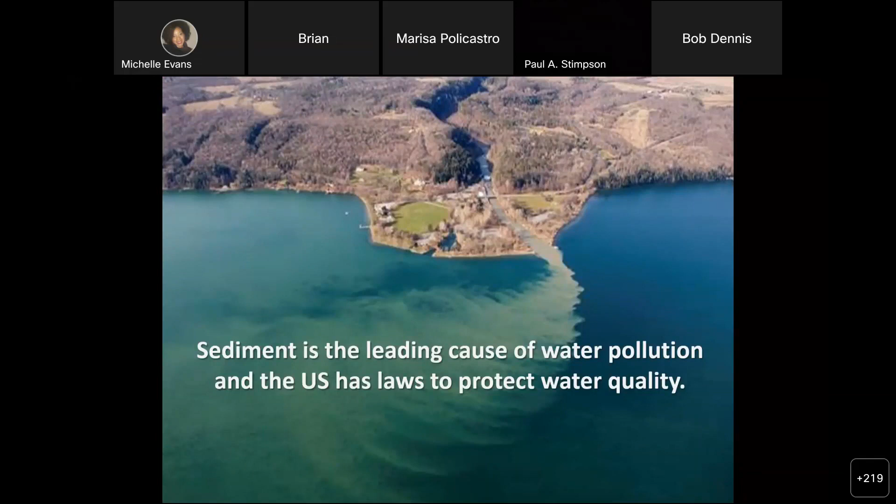And sediment is the leading cause of water pollution. Of course, you guys know the U.S. has laws to protect water quality, particularly the construction general permit as it applies to construction and development rules. I'm going to get through, if you guys can stick with me for the next 3 or 4 slides, they're a little text heavy, but after that we're going to mostly be pictures.

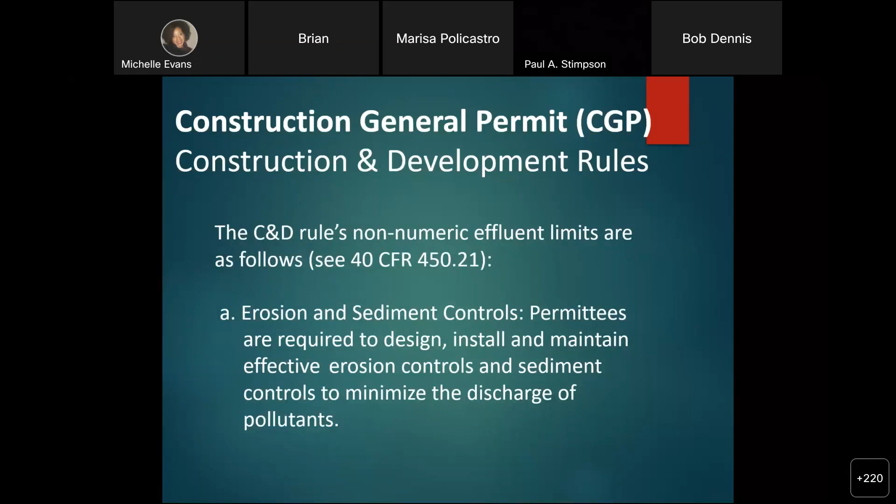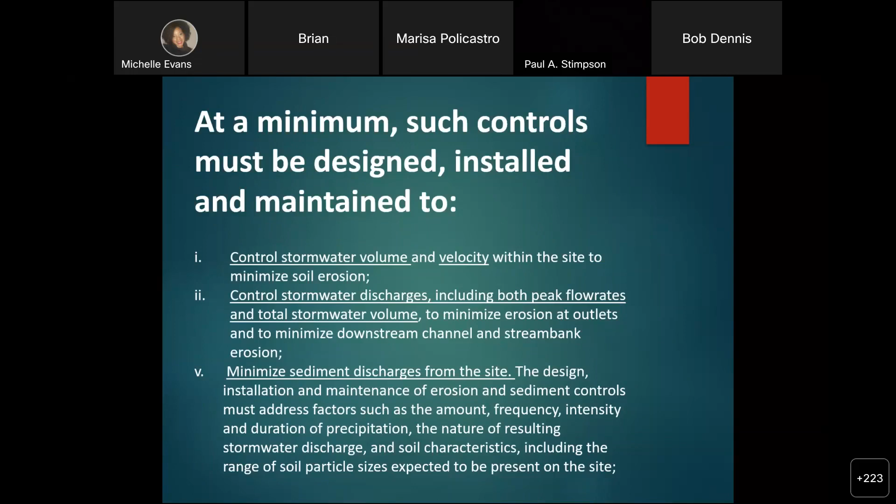So the erosion and sediment control permittees are required to design, install, and maintain effective erosion controls and sediment controls to minimize discharge of pollutants. At a minimum, we need to control stormwater volume and velocity, control stormwater discharges including both peak flow rates and total stormwater volume, and minimize sediment discharges from our sites.

Really, as it pertains to today's conversation, this rule right here regarding surface outlets in the construction general permit states that when discharging from basins and impoundments, permittees are required to utilize an outlet structure that withdraws water from near the surface. I wish they hadn't put 'unless infeasible' there, we don't need to give contractors any wiggle room on this, but this is the rule that really defines how we use sediment basins here in the state.

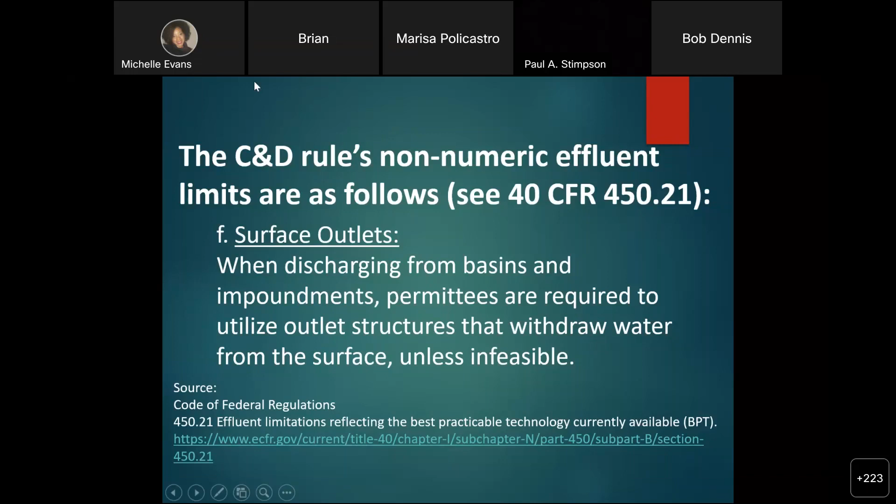If you think about the lint filter on your dryer, we need to change that usually after every dryer cycle or two, or else it clogs up and doesn't work. Same thing with these filters on perforated risers. Once you get a couple good rain events and all the sediment comes in, it blinds over that filter fabric. How do we maintain those? Typically they're not maintained, so subsequent rain events, we're looking at overtopping the emergency spillway on our basins.

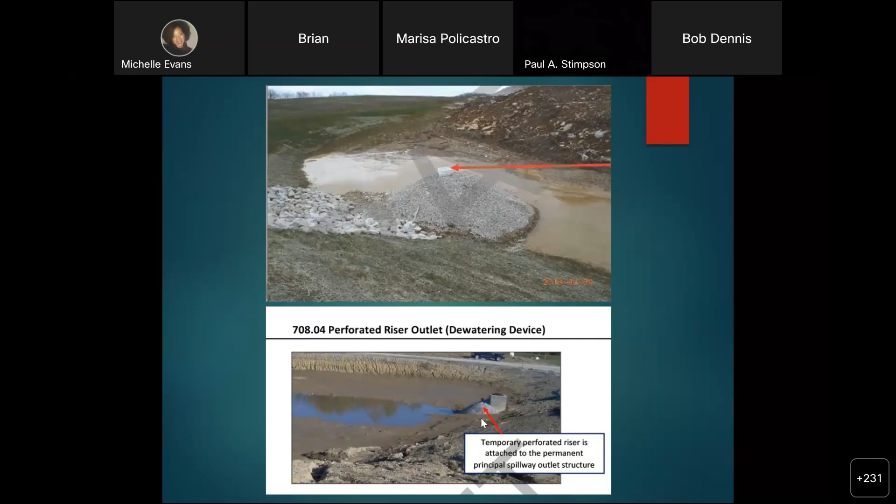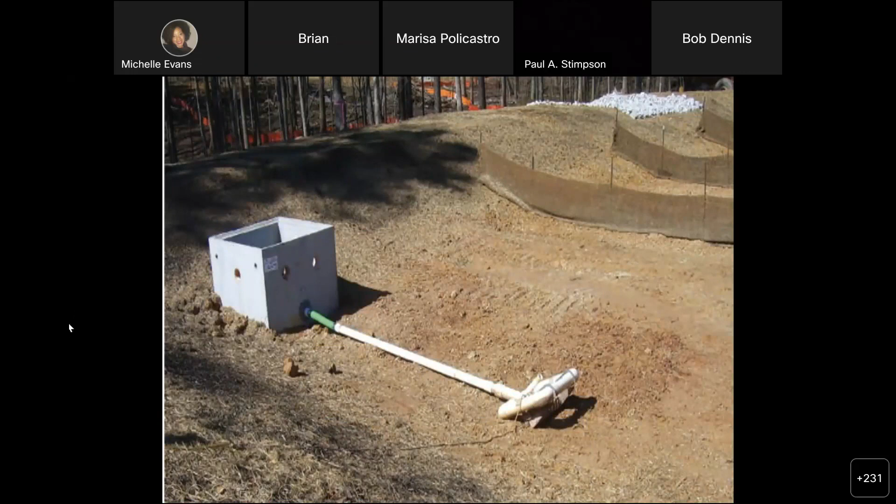Just for clarification, when we talk about sediment basins, we're typically talking about larger drainage areas greater than 5 acres. In some states, we're permitted to go up to 80 to 100 acres of drainage area. These sediment basins are typically characterized by a permanent outlet structure, as you see in the left-hand corner. That's typically what you'd see for a sediment basin compared to sediment traps.

Sediment traps are usually for drainage areas of 5 acres or less is what we're looking at for these. There have literally been thousands of these traps built around North Carolina, and they're very efficient and an economical way to control sediment where we have concentrated flow.

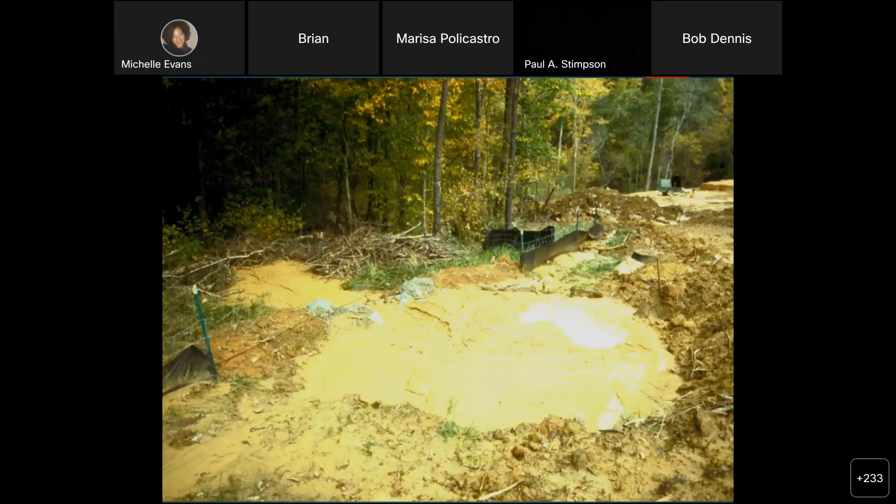So a little background on coming up with the skimmer concept. This is a typical basin, specifically a trap, in what Warren calls the Stone Age. This was standard design and practice in the early 1980s. No one really, as he says, knew what they were doing. It was just a bunch of opinions and some experience that people had.

It was allowed that the volume could be reduced if it was cleaned out more than once a year, and this was really a disaster. As you can see here, this basin is completely full of sediment, no remaining storage for the next storm. You'll notice the large amounts of sediment outside the perimeter of our job site, going down into the woods.

This is typical sediment loss from traps built this way. Here's a hatchet, put in here to scale it and show you the amount of sediment coming off that site. Although this was common, it was clearly unacceptable, and basin design needed to be changed to improve performance. So when Warren was in Orange County, he took steps to change the way sediment basins were designed.

One attempt to improve sediment basins was to size the basin for the entire drainage area, not just the disturbed area. Research stated a need for baffles to work properly. Warren had never seen a baffle, or even a slide of one. As he likes to reference, this was before the internet, so he couldn't Google what a baffle was, but it seemed to make sense that baffles should make the flow meander through the basin to increase the flow length and time of travel, giving more time for settling.

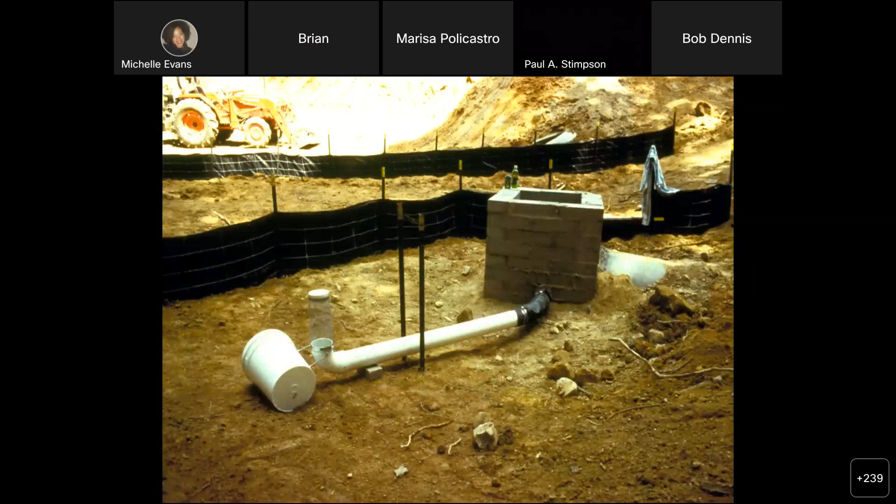So this is the first skimmer that Warren made. He convinced the developer to let him use his basin as a laboratory. He installed it and waited for it to rain to see what would happen. It's about as scientific as it got.

He waited about two months for it to rain, but after that one storm, that first storm proved the concept that the basin filled with the initial runoff and then slowly dewatered over a period of time. There was just a slight dusting of sediment downstream compared to the pictures we saw on the previous slide of the sediment damage.

So he knew he was onto something, and his idea was he wanted the skimmer to be so simple that any contractor could make one. He never imagined getting into the business of making skimmers himself. He had a good, comfortable job with the state where he could do interesting things like this. However, he found contractors cut corners making them and they didn't work properly, which discredited the concept. He also discovered that contractors typically wanted to just take something out of the box, install it, and get back on their equipment.

So he found he had to get into the business of building skimmers, at least in a small way, to provide a quality skimmer. The design had to be more complicated to solve various problems, and this design evolved to solve the problems he encountered using the skimmers in actual conditions found on construction sites. I've shown you a series of his early designs here.

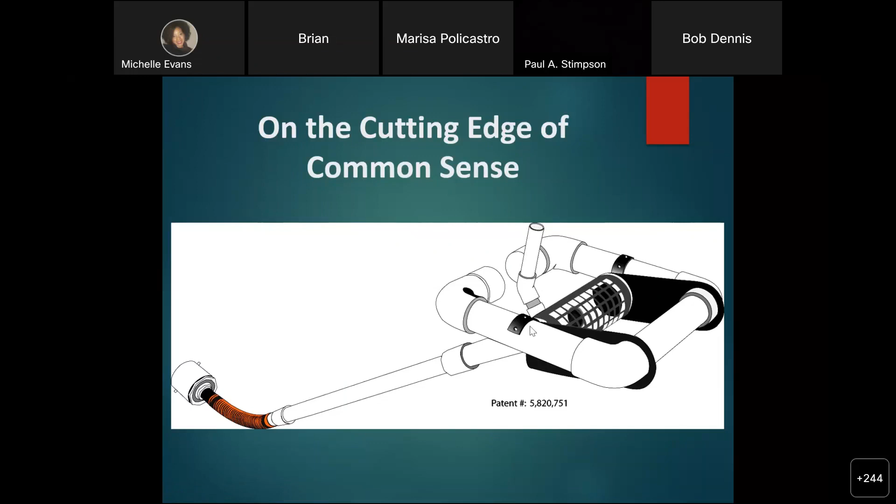Once we open up this screen, you can see the orifice is right up here at the top. We make 8 different size skimmers, and the orifice on each size can be reduced to customize the flow rate. You'll notice that the orifice is at the inlet where it has a constant head and is accessible for inspection and cleaning.

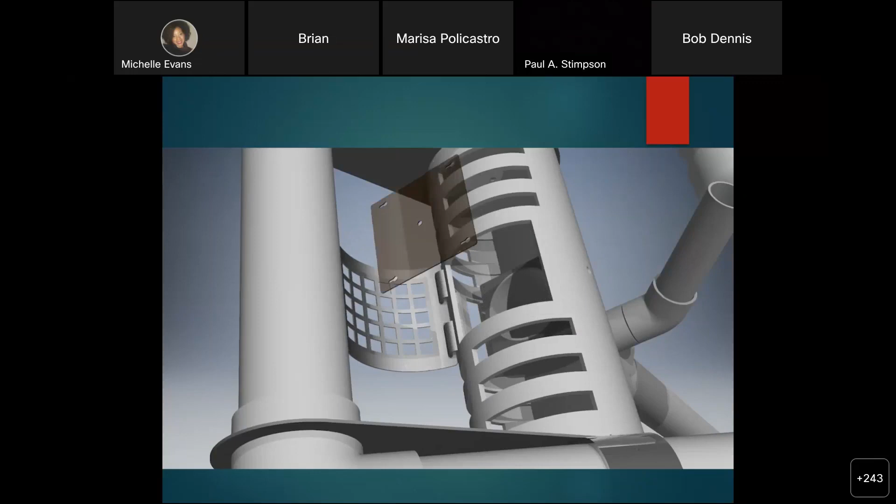We size the skimmer and the orifice for the basin's volume and the number of days to drain the basin. There's a cutter included, and it only takes a couple minutes to cut a hole in the plug or plate and install it. Again, this shows the screen, how you can open it up, change that orifice size plug. The skimmer controls the filling and the draining of the basin.

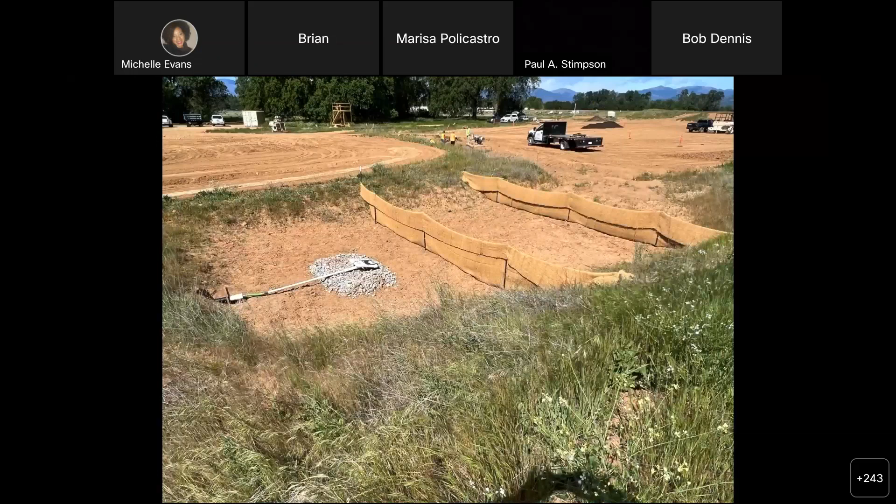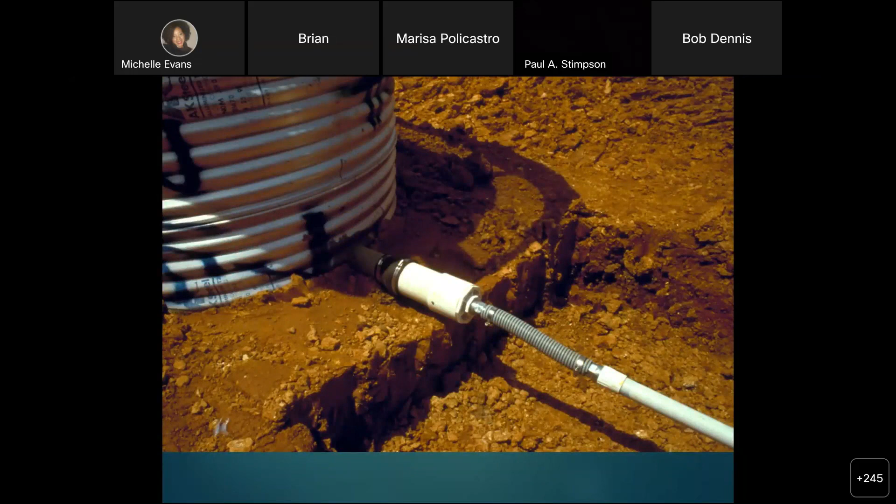These skimmers can be used in sediment basins or in sediment traps like we see here. This shows the connection piece going into that PVC pipe through the earthen dam. In the sediment basin, we're attaching it to a permanent outlet structure. Here's an up close view - you see a stub out from the metal riser, and it attaches to a threaded coupling at the end of the hose. We do have instructions for attaching it to a concrete riser.

We've even used these in tanks. These are some Baker tanks out in California at a landfill, putting the skimmers in there. They're really using these almost as roll-off sediment traps.

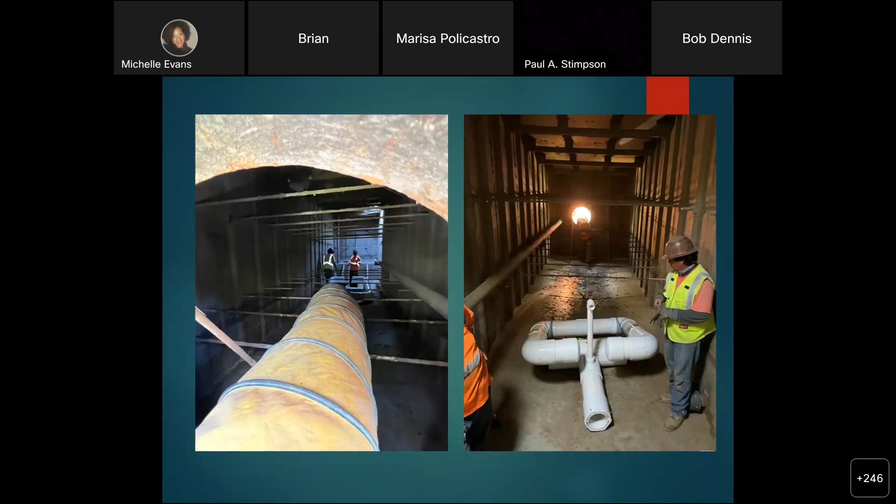One note - if you do ever plan to use these in a tank, we should talk first. These were shipped on site, and then the engineer asked, well, how am I going to get these in my 20-inch manhole? So we had to take a trip to California, cut these, get them inside the tanks, and reassemble them.

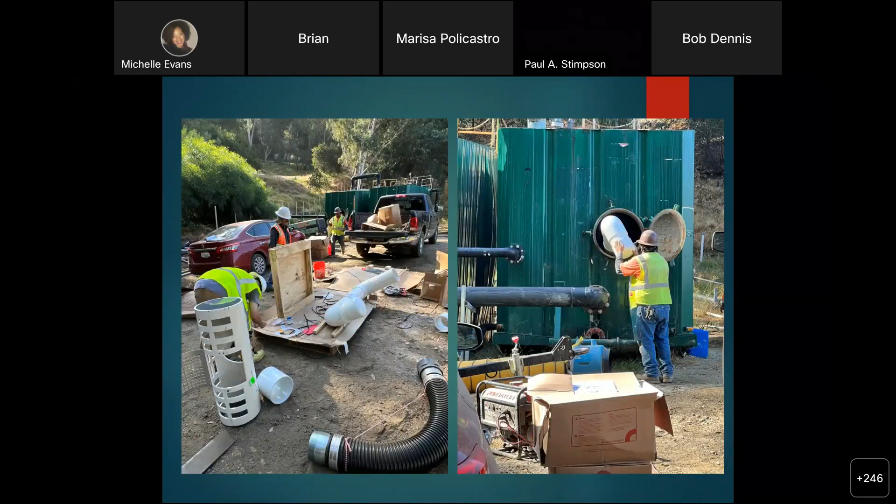So as I mentioned earlier, baffles are a key component of an efficient sediment basin. The skimmer is just one piece of it. And here you see some baffles that were installed. The basin really needs to be designed to handle the volume of the total drainage area, not just the disturbed area. And we want to make sure that clean off-site water is not running into this basin, or come up with strategies to divert it.

So these baffles here are utilized. The baffles help utilize the entire surface area for settling. And these are some of the first attempts to use baffles, and they seem to work based on the sediment accumulation behind the baffles. However, the solid baffles are deceptive in that they would channelize flow, keeping the velocity up, and that would keep the sediment suspended. And these faults were discovered during sediment basin research conducted at NC State University Soil Science Department.

And here's this research, the initial research that was done. This red line showing just the free flow of the velocity coming into the basin. Part of the challenge when you're not using the baffles is that you tend to shortcut through the basin from the inlet straight to the outlet, leaving dead zones on the side of the basin, and the velocity stays up high.

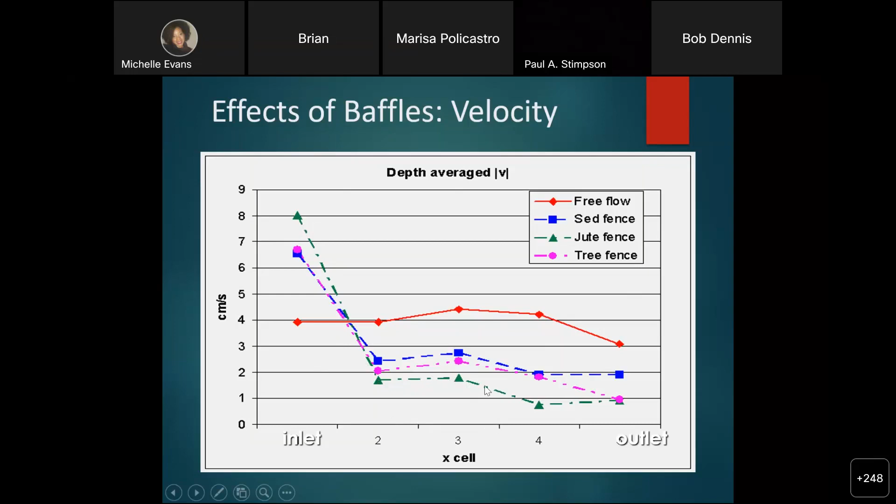When we used, you can see here, what they call sediment fence or silt fence, some of those initial ones, we're still keeping that velocity up pretty high in here. But when we use jute fence, or a porous baffle, typically now we use a coir baffle because it's better for an aquatic environment. But this green line, you can see, here's each one of the cells. So here's the first set of baffles, second set, third set, and you can see when we hit those baffles, we're really slowing that velocity down and increasing the time for settling.

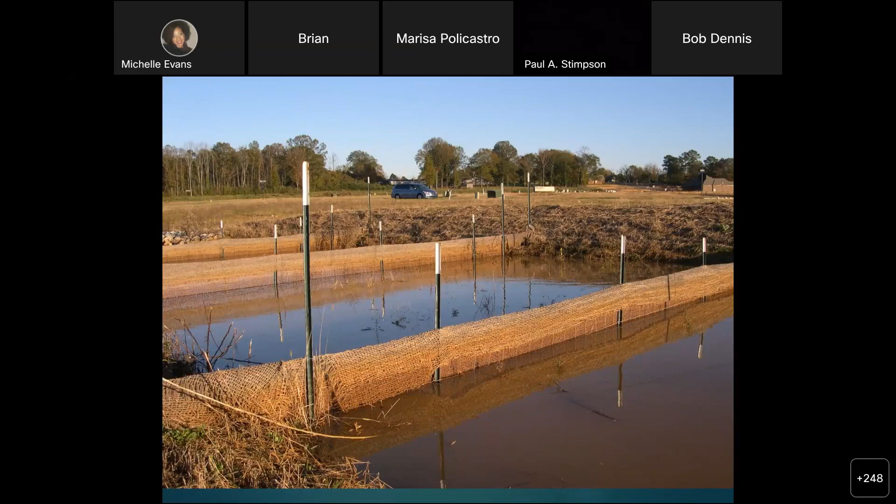So when we talk about the coir baffles, porous baffles, this is what we're referring to, and this is part of the design manual for North Carolina, is using coir baffles.

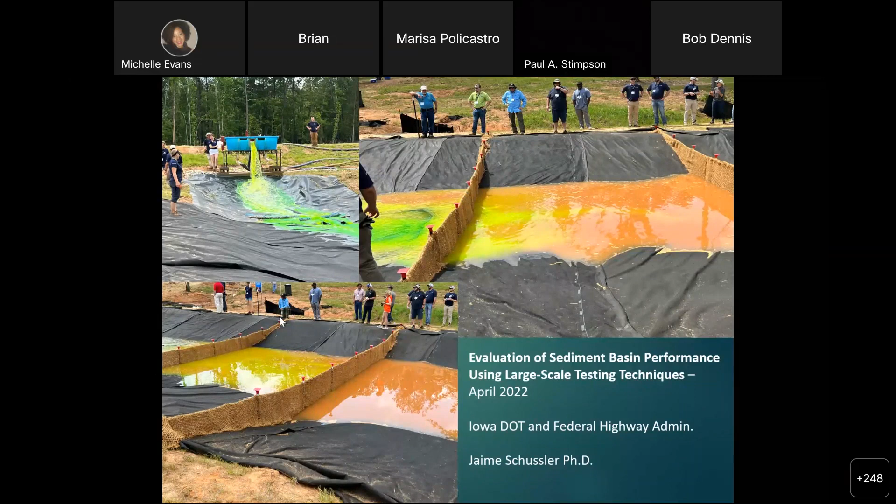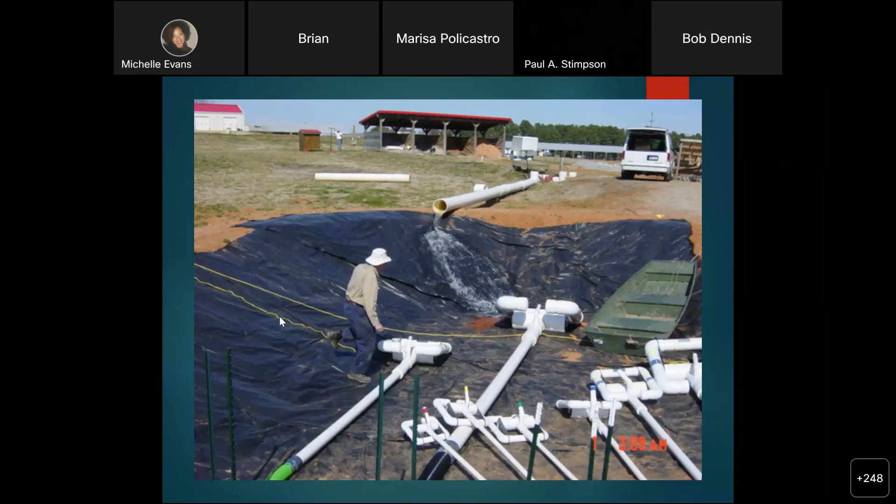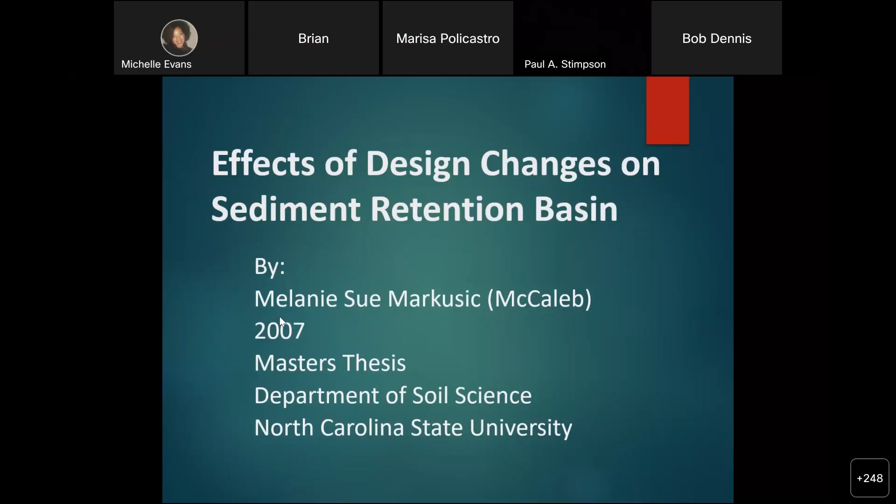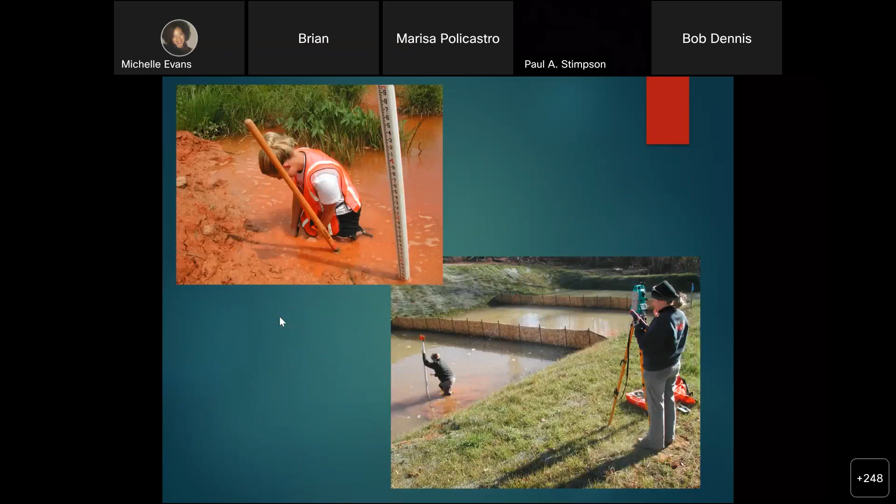You know, in a typical sediment basin with a conventional outlet, like we showed, there's perforated risers. They tend to capture less than 50% of sediment entering the basin. And the question was posed, well, what would be the efficiency of a properly designed and constructed basin with a floating surface drain? So Melanie McCaleb did some research, actually her master's thesis, on the effects of design changes on sediment retention basins. And here's a picture of Melanie out there. I like to throw these pictures in, really demonstrates her credibility and commitment to the science here.

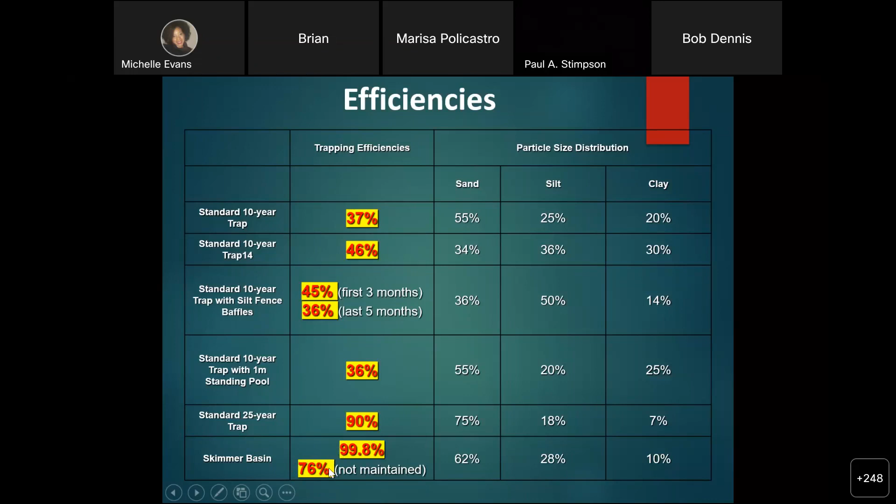So as we see, the traditional trapping efficiency of a standard 10-year trap was about 37%, depending on, there's a couple of different traps. This one's 37, this one's 46%, so below 50% trapping efficiency. When we move that standard trap up to the 25-year trap, obviously we're sizing these much larger, and that efficiency goes up considerably, almost doubles, up here to 90% efficiencies. But the skimmer basin has the highest trapping efficiency of greater than 99%. But like everything, it needs to be maintained, and so after several months of not maintaining it, that efficiency drops. And so we'll talk a little bit about how these are to be maintained.

And it was originally found in Melanie's research that the basin itself, the BMP that's supposed to help us reduce sediment discharge, was a major contributing factor, because the slopes were too steep, they're sloughing off, and greater than 50% of the sediment going into the basin was coming from the basin itself.

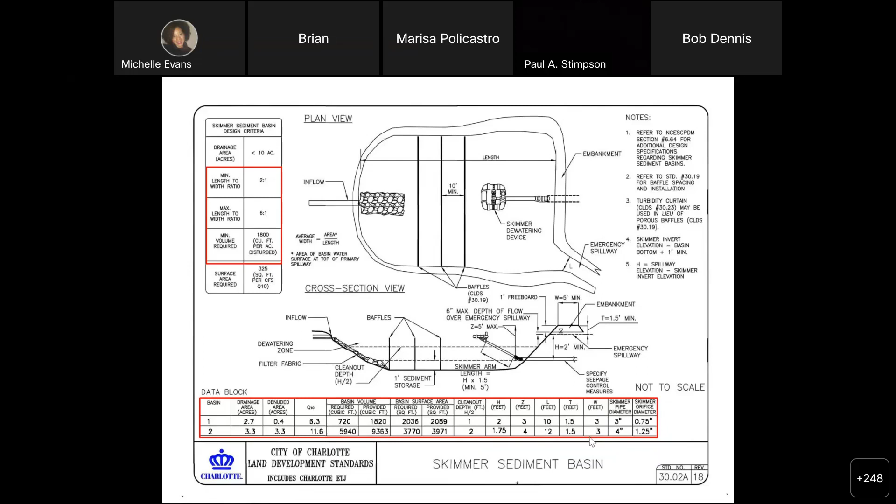It's really good if you're a designer to do your calculations here, and then we put in the size skimmer required. I put it right here in the plans, easy for the contractors to bid on and to install for the plan details. And it's important also to have a rock pile or something for these skimmers to settle down on so they don't settle down into the mud. That will allow for a small rain event to occur, and in small rain events, you won't be discharging that muddy water.

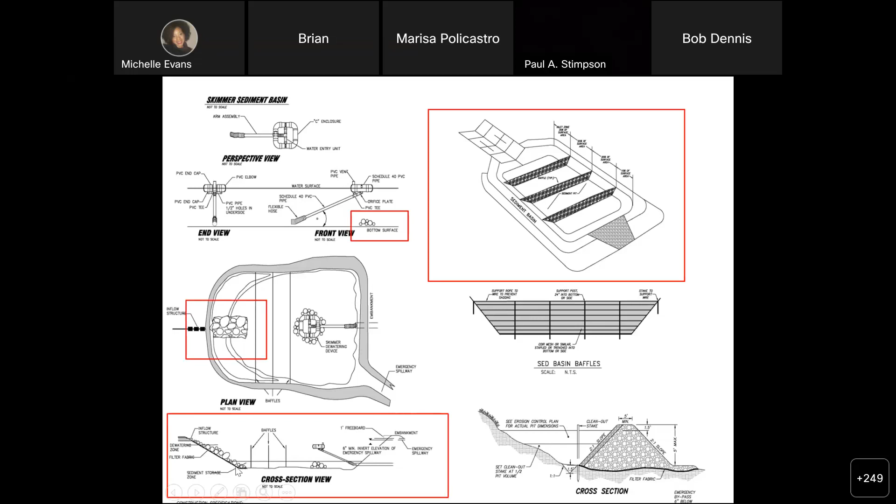As you can see here, that's that longer length to width ratio with a series of at least 3 porous baffles in there. A nice stabilized inlet there, so that inlet is not contributing to erosion within the basin. And here's a side view of the basin, again showing our stabilized inlet here with the rock dissipators, a series of 3 baffles, our skimmer, and a nice little rock pile.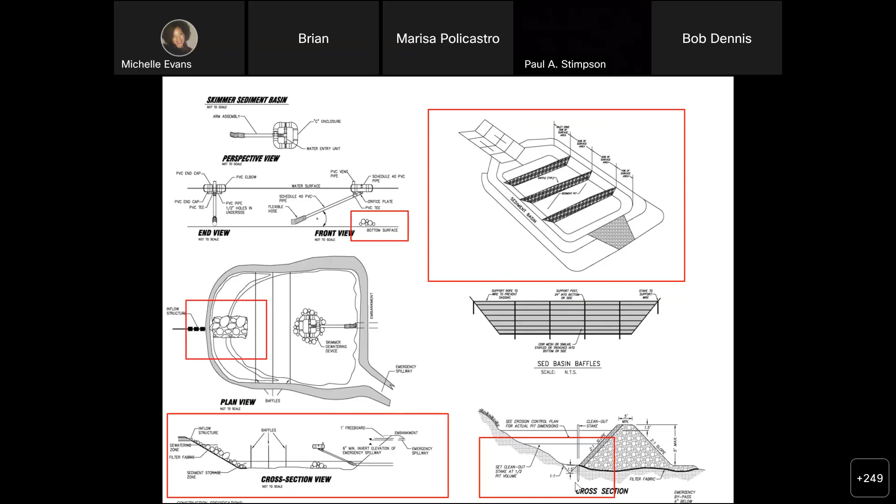And this is a really clever design detail to include: a clean out stake. Because not many people could look at a basin and just be able to tell what 50% of the storage capacity is in that basin. But putting a clean out stake in at the volume at which the basin is half full is a great way to indicate to inspectors, to the contractors, to designers, when the basin's at 50% capacity and maintenance needs to be performed to restore the storage volume of the basin.

Okay. And it should be noted that another problem that can be encountered is turbid outflow from the skimmer over several days, and obviously this can cause complaints from adjacent landowners. And there's a possible fix for this turbidity. It's worth pointing out that the skimmer by itself does not produce clean, clear outflows, particularly in clay soils. So we have some other tools at our disposal.

In North Carolina, we are allowed to use flocculants. Particularly what we use here in the Southeast is polyacrylamide. It's a linear anionic polymer. It's very important that you use one off the DEQ's approved list. It has undergone toxicity testing. These are typically food grade polyacrylamides that have a half-life of 48 hours or less, so we're not concerned about bioaccumulation in the environment.

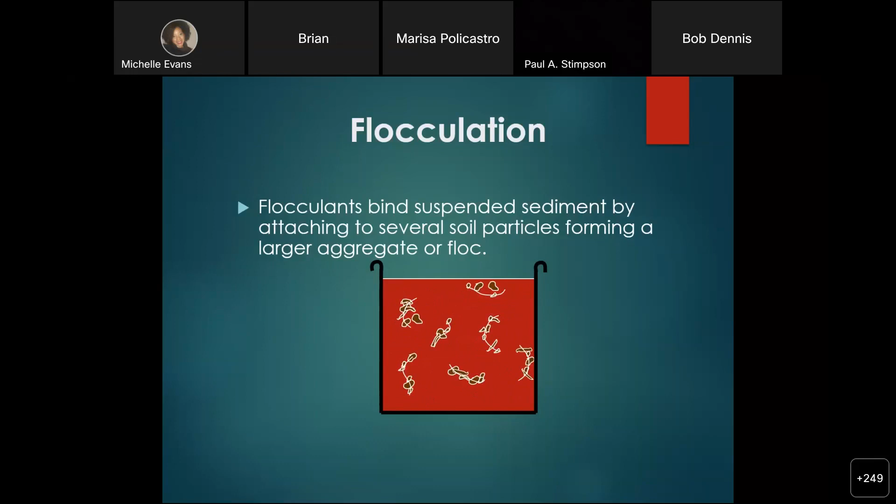But the way that these flocculants work is that they bind suspended sediment by attaching several soil particles to the exchange sites on these polymers. So it binds these, takes a bunch of small particles, binds them together in larger particles, and then those larger, now heavier aggregates will settle out of suspension.

So this is actually a fun little magic trick when we're in person. Love to do this at trade shows. It's pretty cool how this technology works.

It's really best if you can use the polymers or the flocculants in a treatment train and in conjunction with a fibrous matted material or wattles. They just do a great job. It's something about the natural fibers that tend to grab onto these flocculated soils and hold them very, very well.

So on this, we would have put a powder polyacrylamide into this channel. It's important to introduce the flocculants up gradient from the sediment basin, so there's plenty of time for activation, for the mixing, the aggregation, and allow that chemistry to work to drop the suspended solids out of solution.

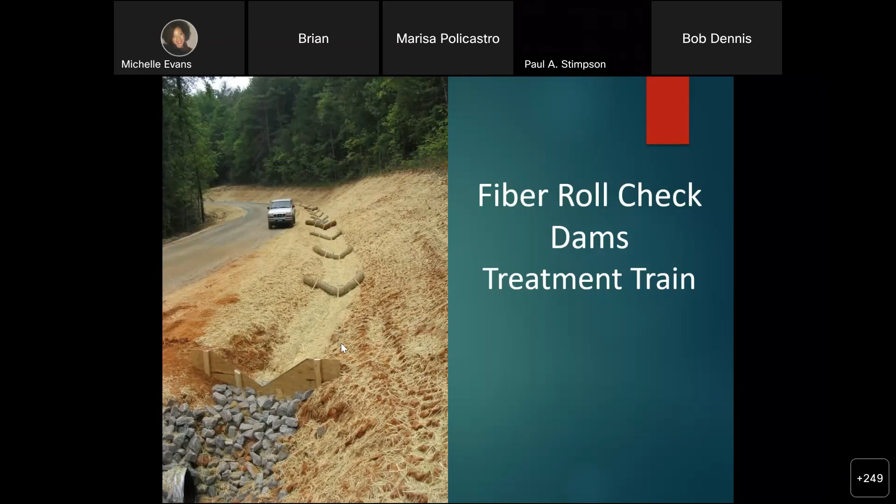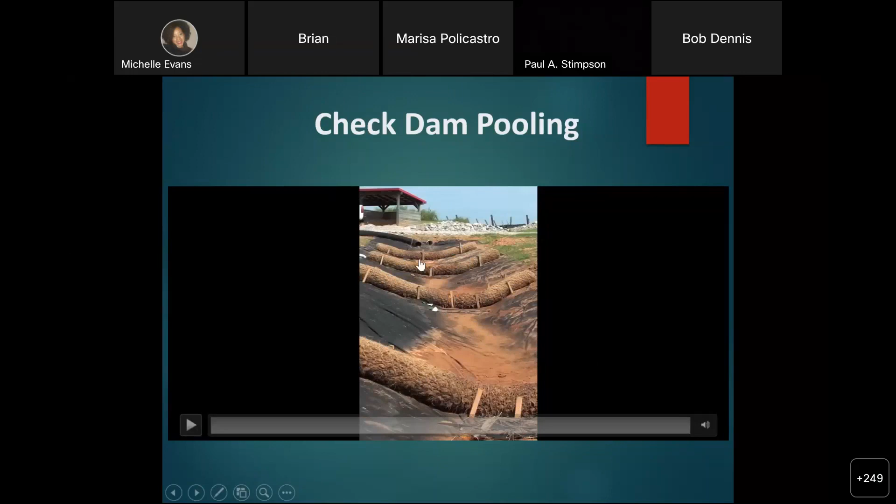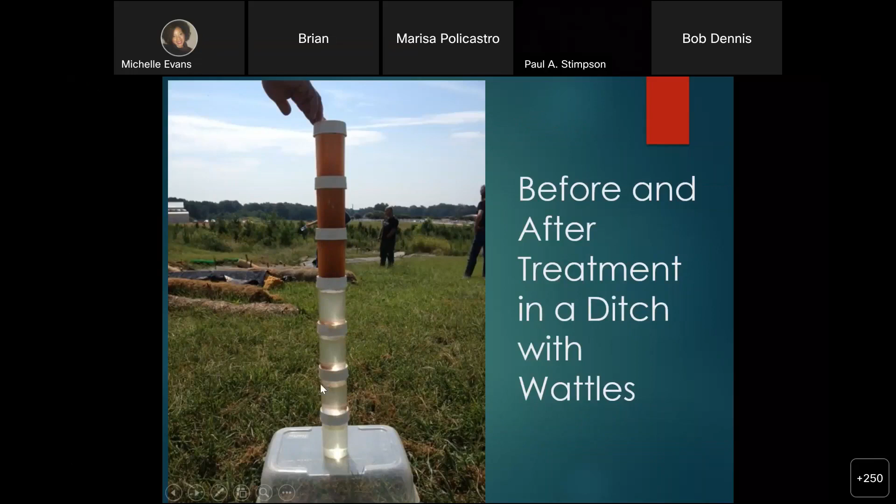And this was again out at the research station at NC State. You can see these coir wattles here were impregnated with polyacrylamide, and it created damming behind each one, pooling behind each one of these floc logs. We took samples behind each one of those logs, and you can tell as we go down through the treatment train how the water gets clearer and clearer and clearer until we're finally discharging here at the end.

And this is a stone ring dissipator at the outfall, entering into the basin, and you can see that stone on the bottom is stained with flocculated soil. But this is what we're looking for. We really want to capture that flocculated soil in the basin. So again, it's important to utilize these flocculants up gradient from the basin, so we can capture that flocculated soil in the basin. We don't want to be discharging that off-site.

And this water is really clear. There's a bad glare on this. It doesn't really highlight how clear this water is, but this is very clean water. So when we get this clean, clear water on the top, and the skimmer is skimming off the top, we're getting really good results coming out of these basins.

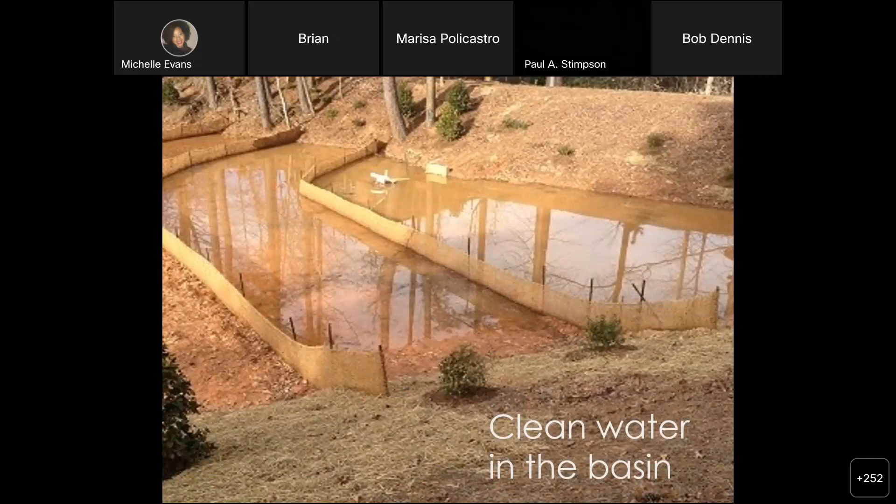So it's important to just highlight what the skimmer does not do. It does not make a hole in the ground an efficient basin. Doesn't allow for reductions in basin size because of improved efficiencies, and will not overcome inefficiency caused by poor basin shape or design. And by itself, the skimmer does not produce clean, clear outflows, particularly in clay soils.

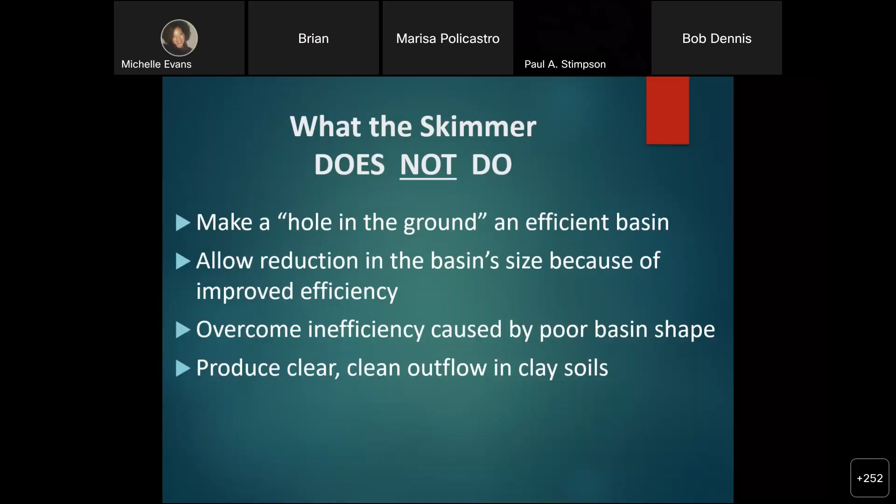What it does do is it regulates the filling and the draining of the basin. Utilizes the basin's volume and surface area, drains the basin from near the surface at a nearly uniform rate, and that reduces the velocity of that stormwater discharge. And it also allows for the varying of the drawdown time by changing the orifice. And all these are going to improve efficiency of the basin.

And like anything, it is important to inspect and maintain these. So whatever triggers your inspections on your site, it's important to go over and look at that sediment basin and the skimmer, see how it is performing when we're out there doing our site walks. Nothing is truly maintenance free, and again, skimmers need to be inspected with regular site visits and maintained to continue to perform properly.

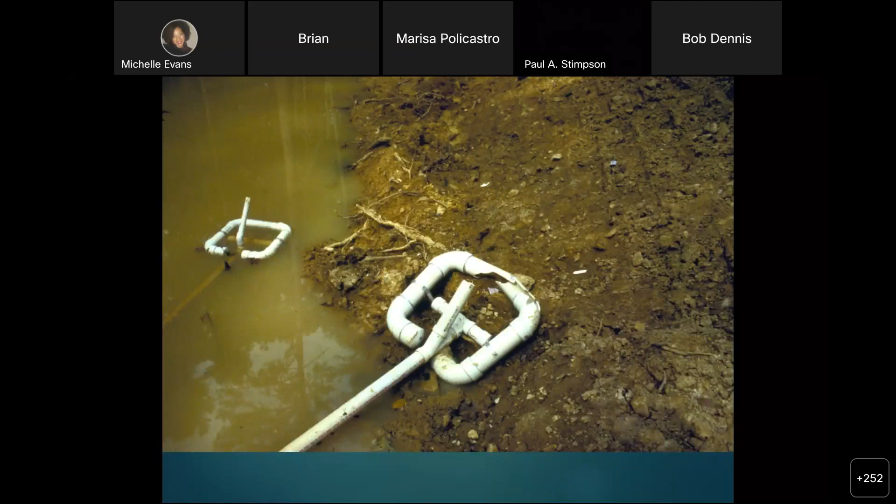So this is kind of a little bit of a bloopers reel. This was someone who built their own skimmer, and one of the prerequisites of a floating surface drain is that it floats, and clearly this one did not pass that test. You want to look for vandalism or damage to the skimmers.

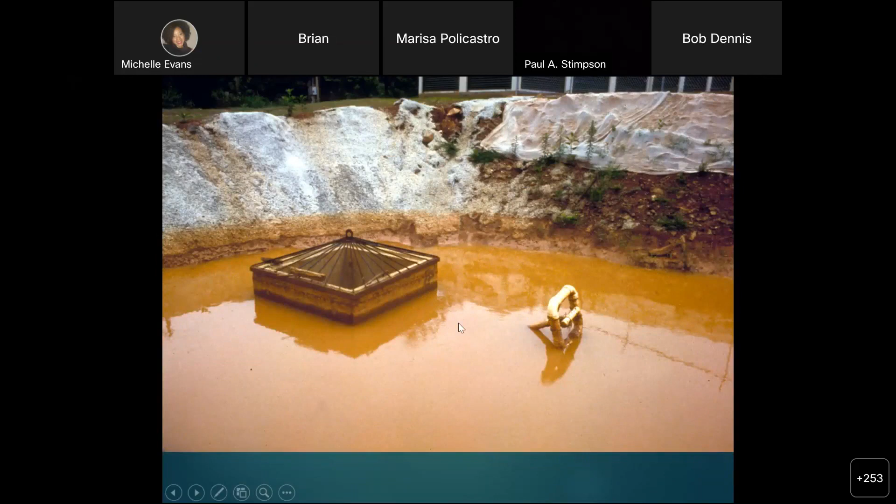This one, you can see the skimmer's out of the water, so how was it draining? The connection from the flex hose to the outlet structure was not sealed, so it was draining from the bottom around the outlet. Obviously, this is not going to float.

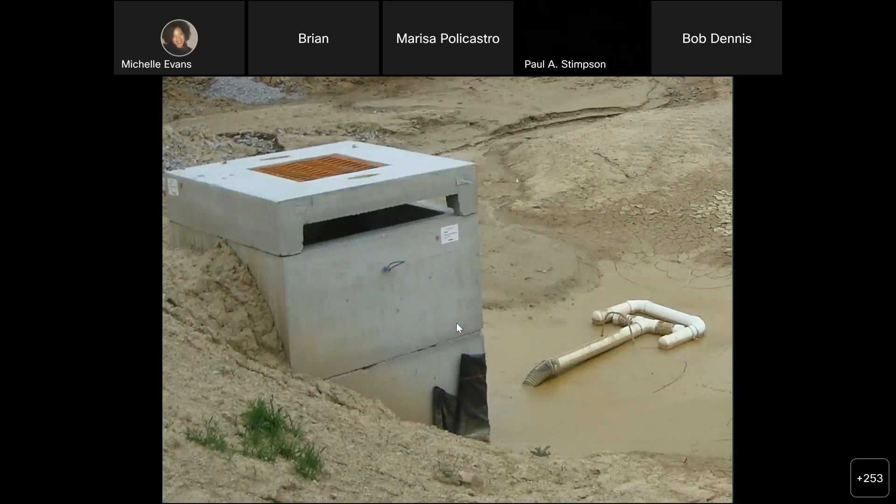An inspector in Ohio sent this one to me, and just thought it was kind of funny. I don't know if you can see the piece of rebar the contractor put here to keep the skimmer from floating up. He said it drained better when it didn't float on top.

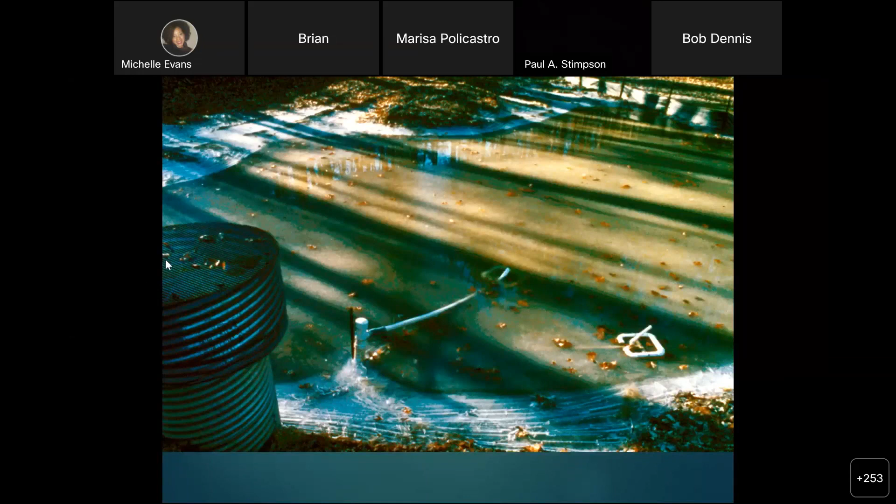And in North Carolina, we do deal with some ice. Typically, 2 or 3 inches of ice are not going to be a problem for the skimmer. Typically, in this situation, the skimmer continued to drain and just deformed the ice into a bowl. But in certain climates where the water is going to freeze, like in Minnesota, we just pull these out at the onset of winter before the water bodies freeze over.

And clogging can be an issue, especially in the fall when we have leaves or after the site has been mulched with straw mulch and it rains. The float does act as a guard for floating debris, but in this type of situation, all the skimmers come with a rope attached to them, and we typically tie this to a T-post on the bank and just give this a couple little tugs and it'll swish all this free. If it doesn't, we showed you earlier how you can just pull this over to the side and clean it out.

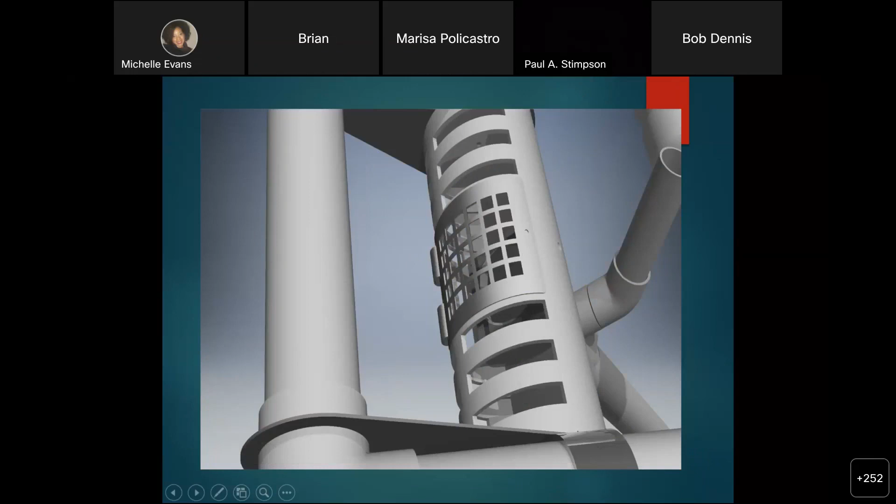And again, this is just showing that on the larger skimmers we have these slots cut in here, but it's very easy to just open this up and clean out that orifice. If it ever gets clogged. So we kind of discussed the maintenance on these skimmers, but it's really good, if you get out to the site and you have turbid water in the basin, to reapply the flocculants as specified. You want to remove and properly dispose of the sediment when it accumulates to half the design

volume, and remove trash and other debris from the skimmer, the emergency spillway, and the pool area. And you also want to periodically check the embankment, the emergency spillway, and outlet for erosion damage, piping, settling, seepage, or slumping along the toe or around the barrel, and repair those immediately.

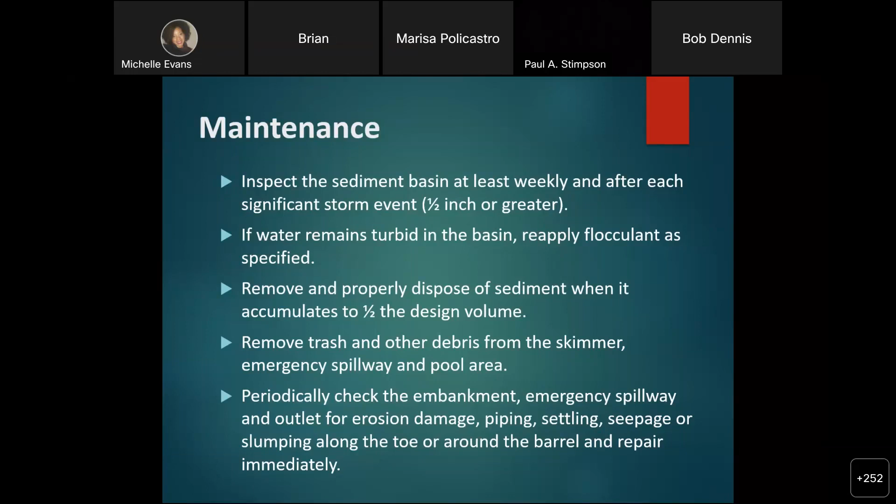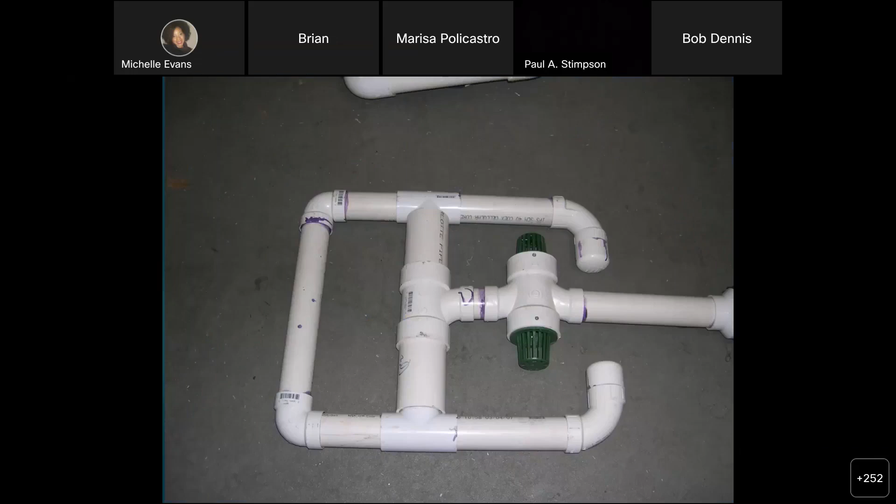So there are some other skimmer designs out there. These are some pictures of other ones. Some of them are actually homemade. If you ever get on a site and you see this purple stuff, the purple glue, housing inspectors want to see this in your house to make sure that the plumber glued your plumbing together before putting up the sheetrock. But we should never see this purple stuff on a skimmer on a project. It means it was homemade, and there's just no telling how or if it will drain.

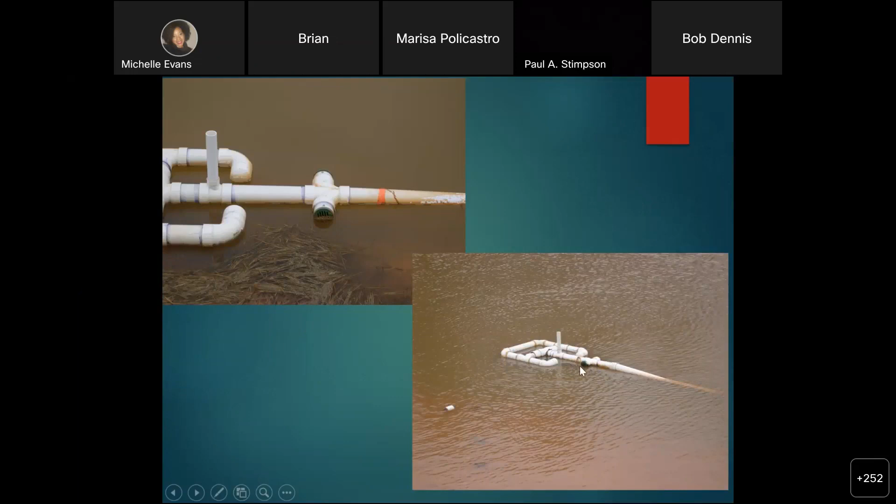You can see on this one, the orifice is not below the water, so this is not going to drain properly. Again, having the vent above the orifice is not going to prevent siphoning. This is a poor connection here, taking a flexible corrugated pipe and attaching it to the PVC. This is not airtight, so you can see this barrel is full of air floating on top, and you're really just draining from right here at that poor connection.

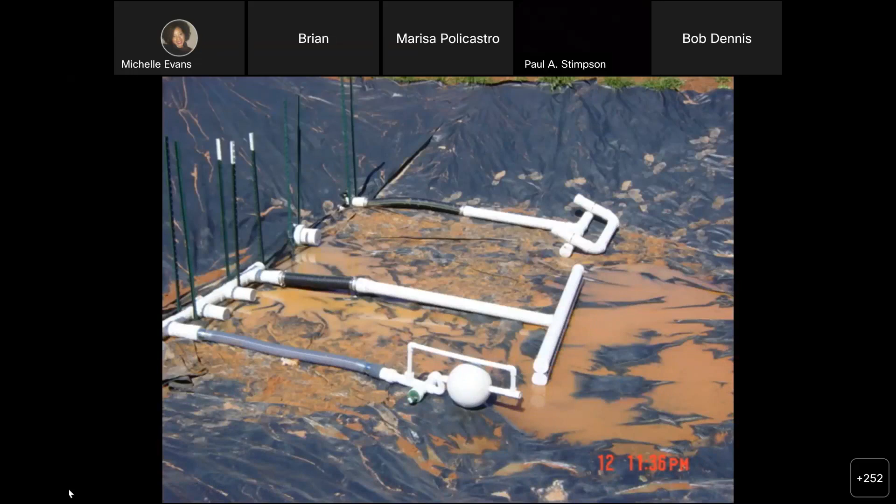So as I mentioned, there are other skimmers out there, and there are other manufacturers of skimmers. So there are other options out there. And back in 2013, Georgia Soil and Water, before they reissued their erosion sediment control manual, went to the Texas Research International down in Denver Downs in Anderson, South Carolina, and asked them to evaluate these floating surface skimmers. And TRI published this and presented this data at the International Erosion Control Association's annual conference in 2015 in Portland,

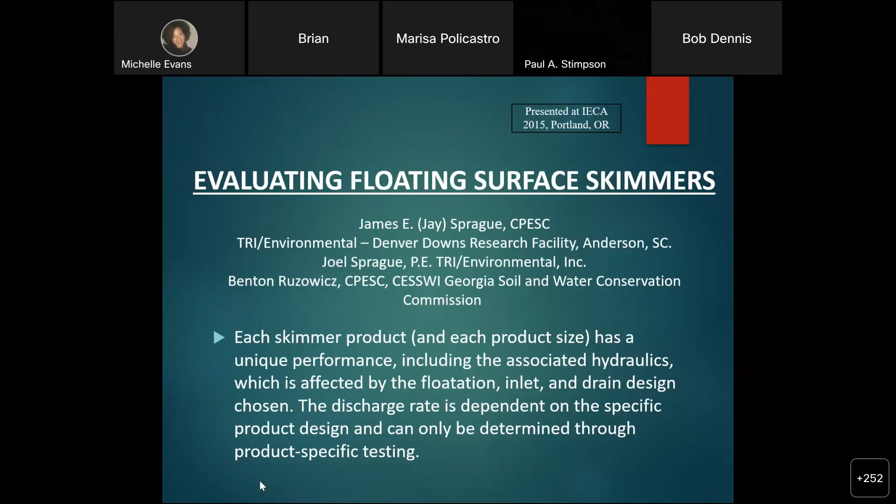Oregon. And basically the takeaway, I boiled down the 30-page report to this right here, is that each skimmer product has a unique performance, including the associated hydraulics, which is affected by the flotation, inlet, and drain design chosen. The discharge rate is dependent on the specific product design and can only be determined through product-specific testing. And this is really important. It basically says that not all skimmers drain at the same rate because they use different design components. And that just makes sense.

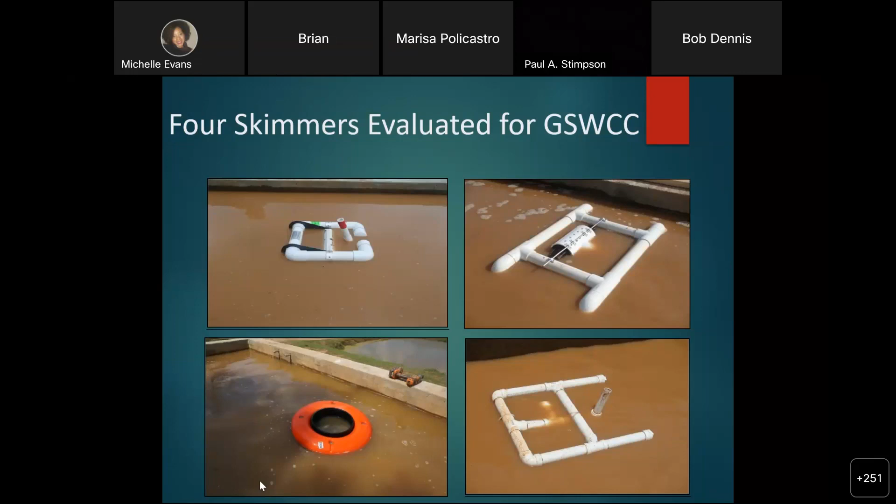But unfortunately, in North Carolina, especially with the DOT, when skimmers are spec'd on those projects, they just say use a 1.5-inch skimmer, a 3-inch skimmer. They just call it out by skimmer size. And as we'll get into, not all of these, and you can tell they don't look the same, are made from the same components, and therefore they do not drain at the same rates.

So what we're looking at here is two 3-inch skimmers. We're not identifying these by brand, just to highlight this is a type 1 skimmer and a type 3 skimmer. The flow rates are in gallons per minute. When the basin is full at almost 4 feet of depth, this one's draining at 53 gallons per minute. This one's draining at 90 gallons per minute. And as the basin gets lower, when we're getting really low at 7 and 8 inches, this one's flowing at 33 gallons per minute. This one's flowing at 66 gallons per minute. And these are both 3-inch skimmers.

So say you used this type 3 skimmer as your basis for design, and you're anticipating it to flow at 66 gallons per minute. Well, if this other skimmer was installed instead, it's not going to flow fast enough, so you're probably going to be overtopping your emergency spillway even after a small rain event.

Conversely, if this skimmer was used as your basis for design and you installed this one, your basin will probably never fill up. You don't get that time for settling, and you're going to be discharging more turbid water.

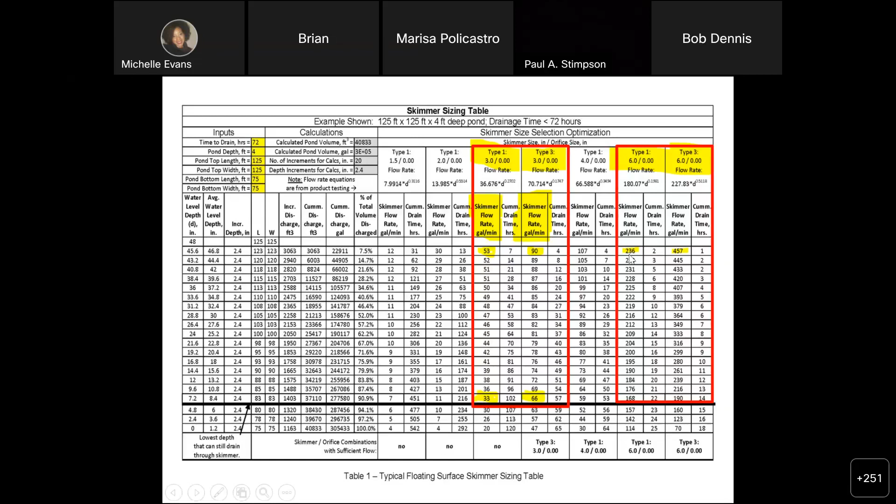So in Georgia, they actually require you to put the manufacturer's name on the plans. They recognize that the flow rates are dependent on the type of skimmer that was used during the design calculation, so they want to know what manufacturer was used as the basis for design.

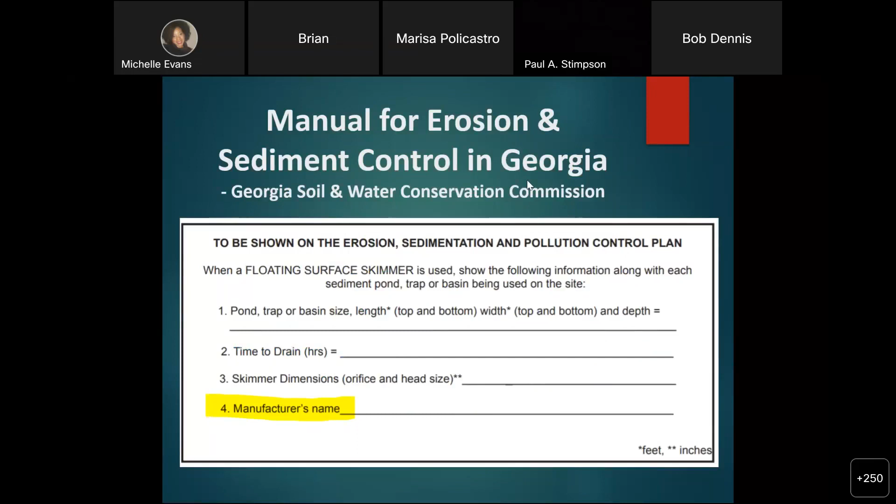So here's how you specify or select and specify a skimmer. It's really a performance specification based on the volume of water we need to capture and the number of days that we want it to dewater in. There is an ASTM standard for calculating the dewatering time on the skimmers, and it is best if you're a designer to put the name of the skimmer manufacturer on the plans.

I know on a lot of public projects, they don't want a sole source or a proprietary specification. So if you are going to put 'or approved equal' on your plans, you want to make sure that you're getting an equal to the product that you designed with.

The Faircloth skimmer's been out there a long time, and a lot of people use our sizing calculator. Probably 98, 99% of the time that we see plans with a named skimmer on them, it will be a Faircloth skimmer. But we see 'or approved equal.'

So you want to make sure if you use our design calculator to design this, that if you're accepting alternative products, that product has been tested. Again, it's a manufactured product, not a homemade product, and you need to send the dewatering calculations back to the engineer to get them to sign off on it.

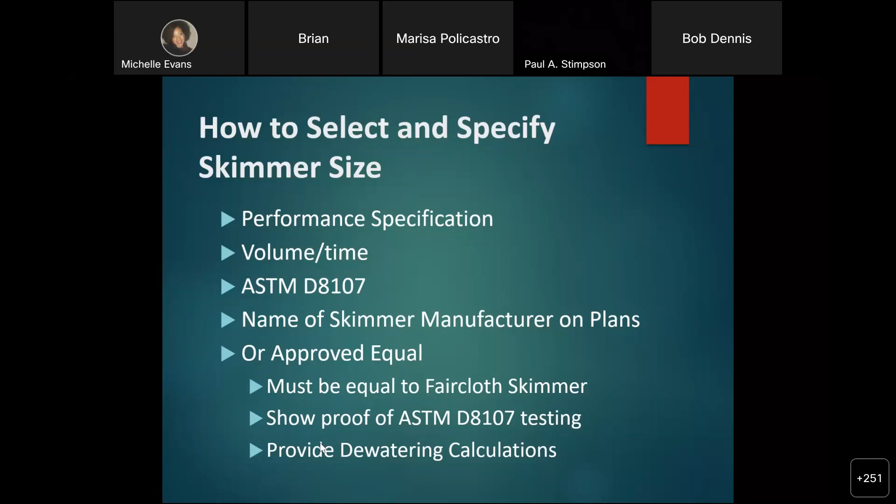I just tell engineers, this is a way to really protect the integrity of your designs. You're not letting a grading and excavating contractor undo all those drainage plans and dewatering calculations that you spent all that time calculating. It can be undone at the very last step of your project by allowing an inferior or alternative product to be installed.

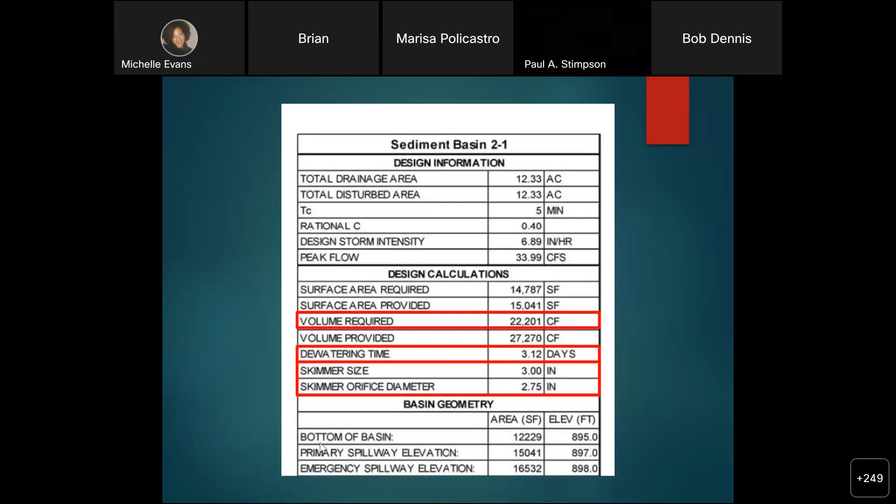So this is what we like to see on the plans: when you call out the required volume, the number of days to dewater, and the skimmer size and orifice diameter right there on the plans, making it easy for the contractors to see what you're calling out. There's a very easy calculator to use on the website, and most of the manufacturers will have a sizing calculator.

So say if we want to do 92,000 cubic feet in 2 days, it's going to tell us we need a 6-inch skimmer with a 5.7-inch orifice. And if you were to put in 200,000 cubic feet in 2 days and hit enter, now we get an error message saying the maximum flow rate for a single skimmer is exceeded.

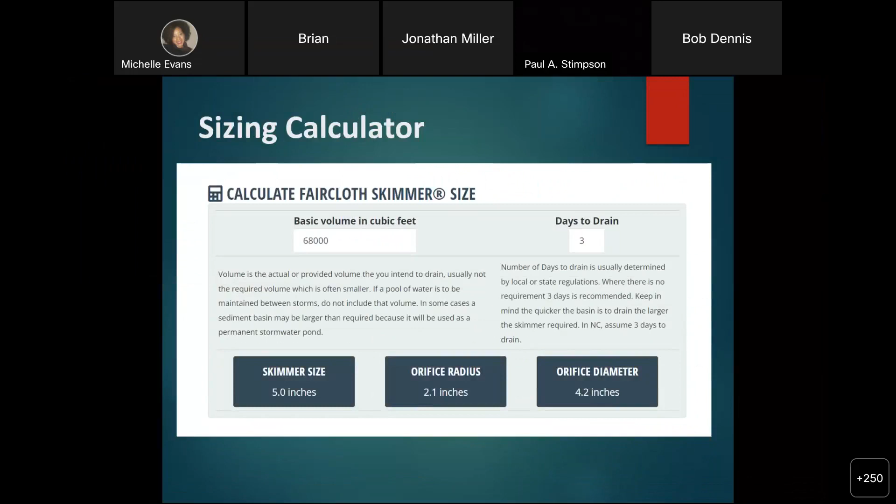More than one skimmer may be required, so you might need to use multiple skimmers. But within reason, we want to make sure that we're not putting too many skimmers in a basin. We do have guidance for using multiple skimmers in a basin.

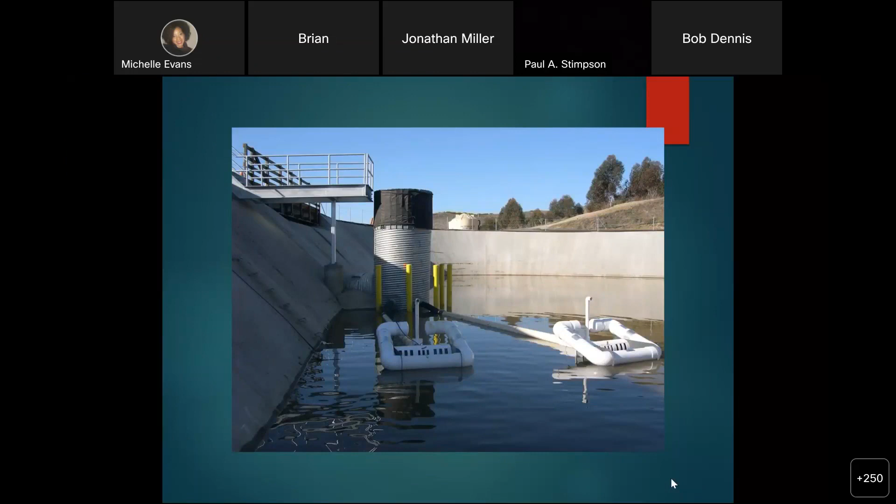This is out in California, a large landfill. It doesn't get a lot of water until they do, and they need to be able to treat it quickly. But again, too many skimmers in a basin can get tangled - while this is actually just a testing basin, there are valves down here at the bottom of each of these to turn it on and off.

If we use multiple skimmers in a basin, you might need to rethink whether the basin is catching too much runoff from off-site, or probably just need to rethink the drainage areas or the calculations for the skimmers if we end up using too many in a basin.

So lastly, we're going to finish talking about post-construction stormwater ponds, and we have an innovative new technology. It's really a flow control technology for controlling post-construction stormwater ponds.

These permanent stormwater basins really suffer from some of the similar problems that sediment basins do, in that they don't always fill and drain properly to give the intended benefit. They drain from the bottom, releasing the most polluted water, and they utilize weirs and orifices that only hit the peak allowable flow rate when the pond is completely full. Outlets easily clog with trash and debris, which adds to operations and maintenance costs. And in general, they do not efficiently utilize that expensive hole in the ground.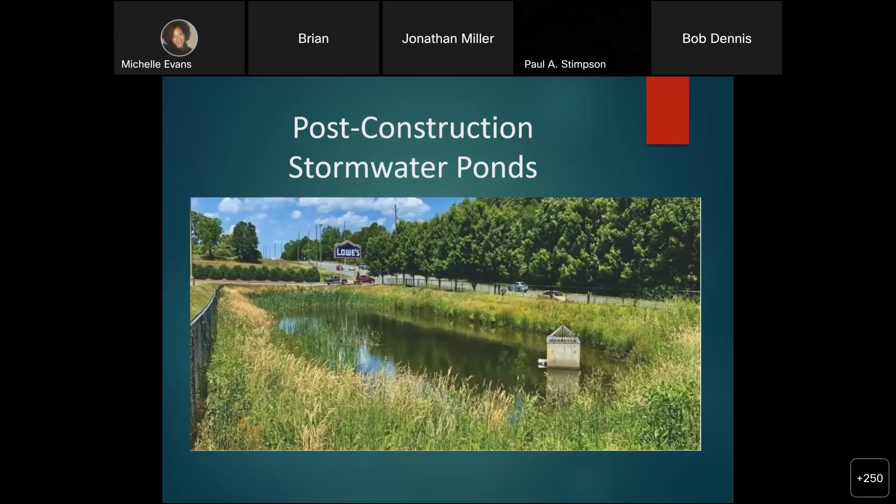And so, let's not forward here. Let's see. There we go.

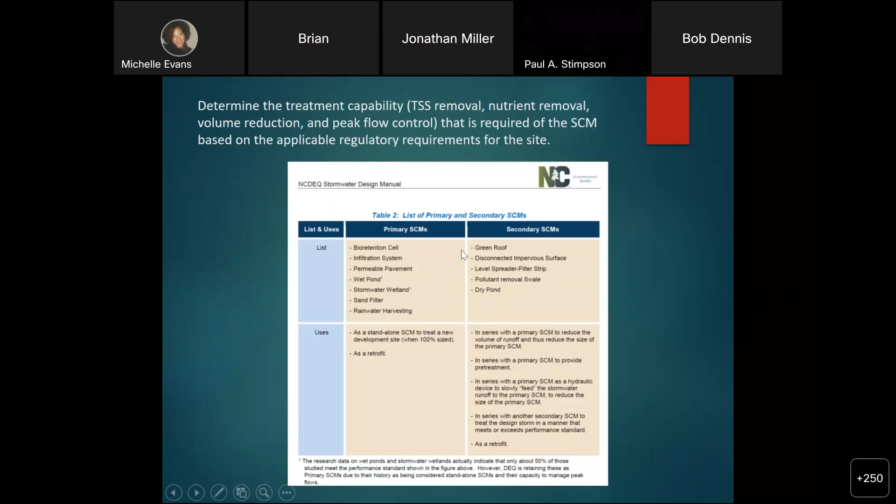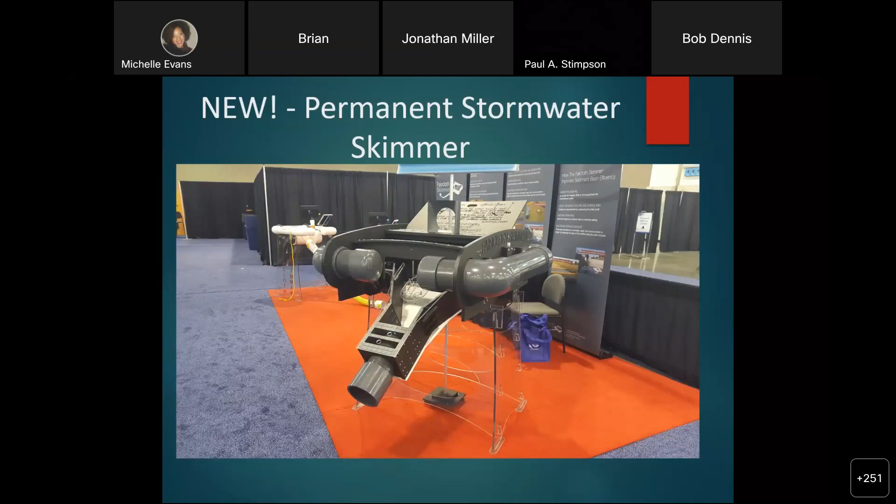And so the latest thing that we've come up with is this permanent stormwater skimmer. It's really an innovative flow control device for post-construction stormwater management. Unlike the temporary sediment basin skimmer, this is made out of a marine grade material, a starboard plastic, Schedule 80 PVC. We're looking at close to a 30 to 40 year expected life on this. And as you can see, there are trash guards, trash racks in the back, on the sides, and on the bottom of this.

But what makes this really unique is the flow capacity of this. Again, the orifice is near the top, so it provides a constant head and is larger than the construction stormwater skimmer. So it can actually handle larger flows and is less likely to clog.

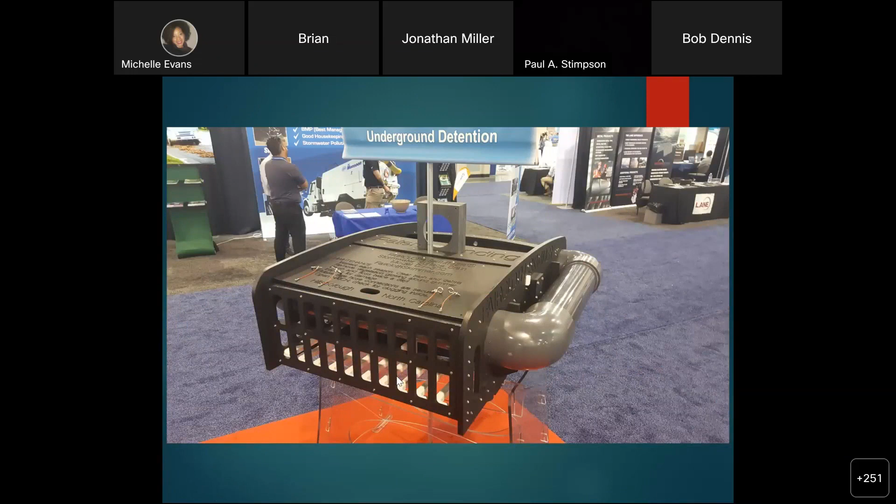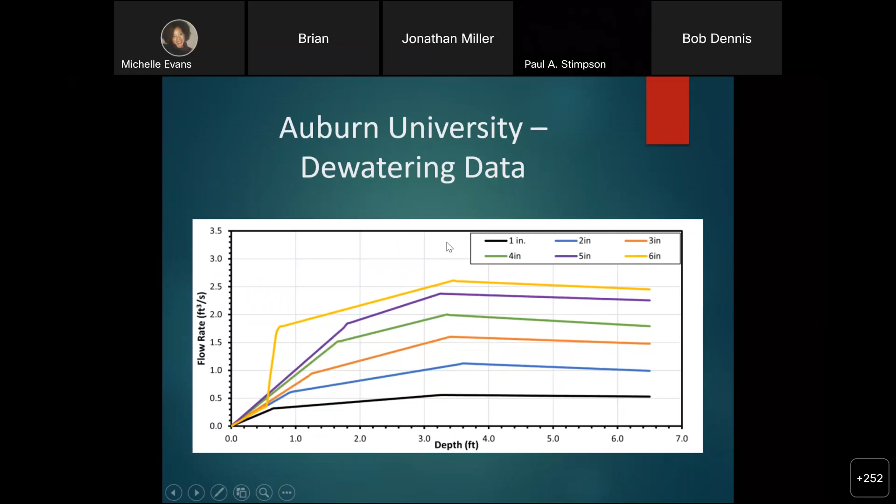So we took the skimmer down to Auburn and put it in their tanks down there. They had a digital level logger that took readings every 5 seconds and logged those. And so we were able to come up with this dewatering data. The interesting thing here is that you can see we're able to hit peak flow rates in these basins at a depth of only about 3.5 feet, which is really important when we compare that to traditional basins that are usually anywhere from 6 to 8 feet deep.

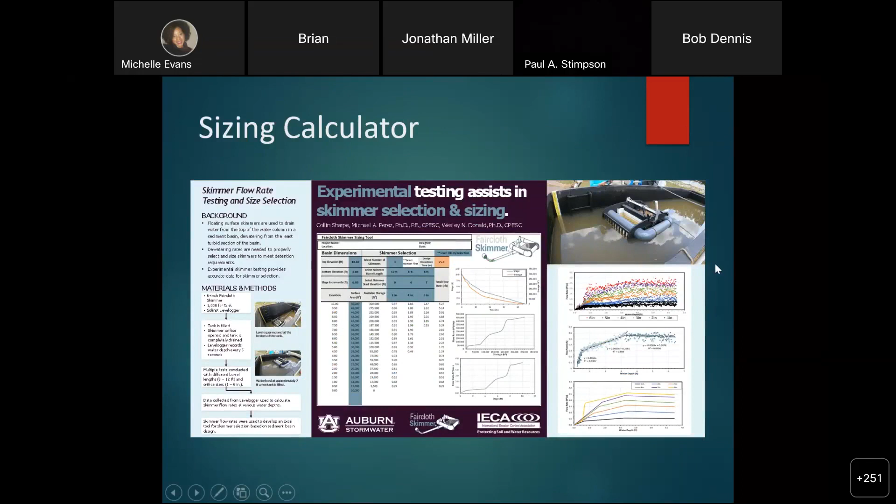And there's a paper based on that research that was collected, presented at the IECA this past year in Minnesota. It came up with a sizing calculator for this new stormwater skimmer. You can see all the data points that were collected. It was triple replicate data to come up with these flow rates.

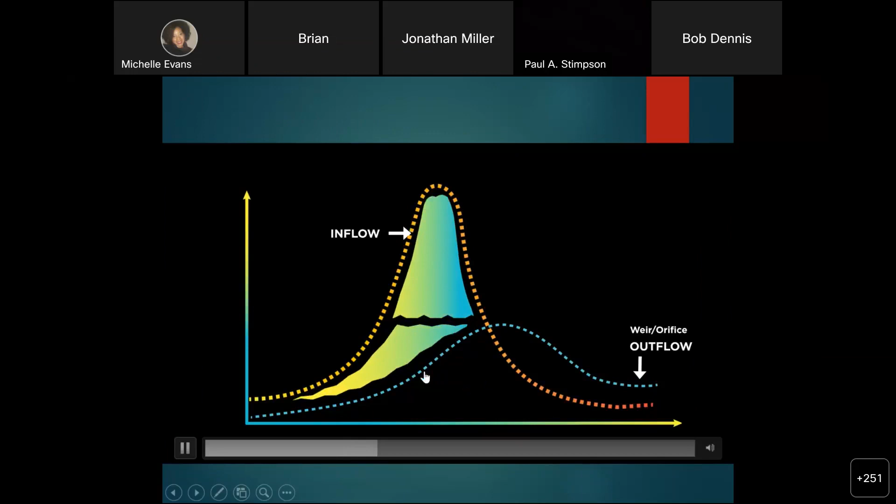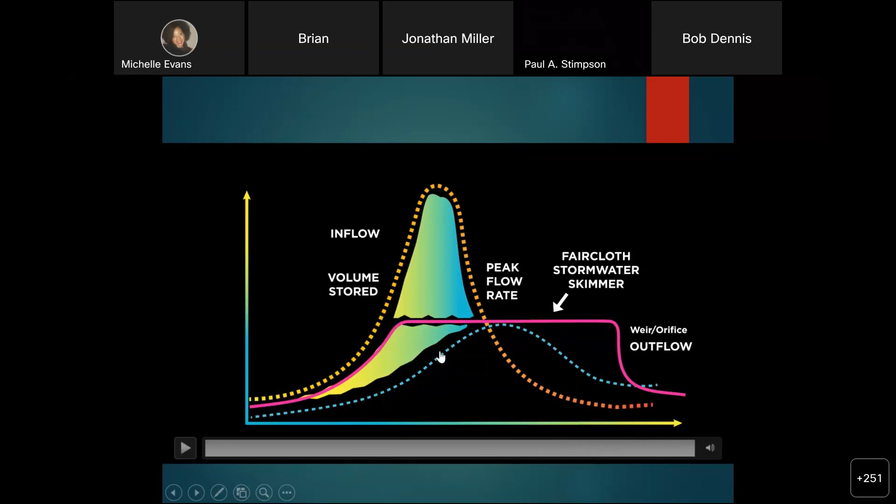Really what makes this unique is when we look at the different hydrographs, the inflow versus outflow hydrographs. Here's our inflow hydrograph and our hydrograph using a weir orifice. This represents the volume of water stored in the basin, and when utilizing a traditional weir or orifice, we only hit that maximum allowable peak flow rate when the basin is completely full, when we have the maximum amount of head pressure over that bottom weir or orifice. With this new stormwater skimmer, we're able to hit that flow rate much earlier in the rain event and carry it much longer. And so what this allows us to do is show a potential reduction in the storage capacity.

This kind of highlights again what we just looked at, but this volume underneath, right in here between these two curves, represents the potential reduction in the storage for these basins, and it represents about 20 to 50% potential reduction.

So we're still working. We're waiting to get our TSS reduction data back from Auburn. We're anticipating it to be at least a 20% reduction in TSS. And once we do that, we'll be taking this to DEQ to review for potential inclusion as an SCM for stormwater management. But it's a way that we can easily convert sediment basins to post-construction stormwater ponds, maximizing land use with potentially smaller ponds by reducing the volume of impoundment required.

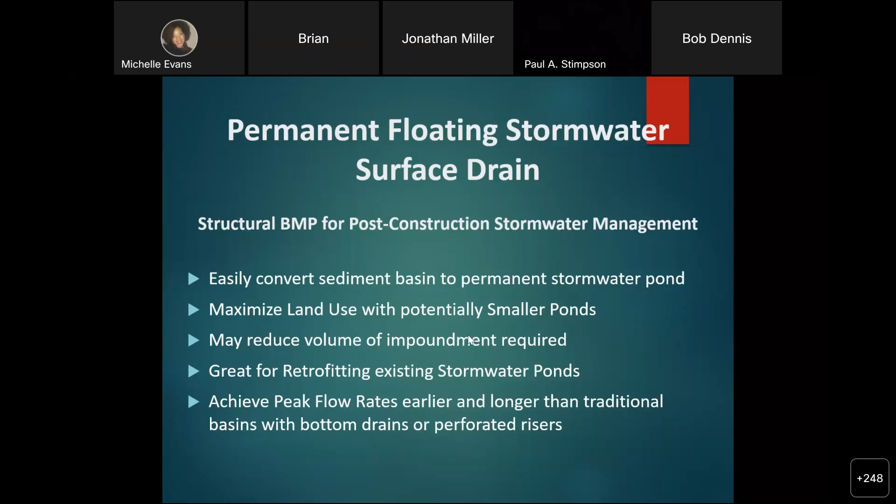And these are great for retrofitting existing stormwater ponds. That's probably the biggest interest we've received from inspectors and regulatory personnel, the potential to get these underperforming ponds working properly. Maybe they are receiving additional runoff from additional impervious surfaces contributing to the runoff, more intense rain events, or maybe they were just poorly designed or installed ponds to begin with that don't have enough capacity for handling rain events. So we're able to do that because we can achieve those peak flow rates earlier and longer than traditional basins with bottom drains or perforated risers.

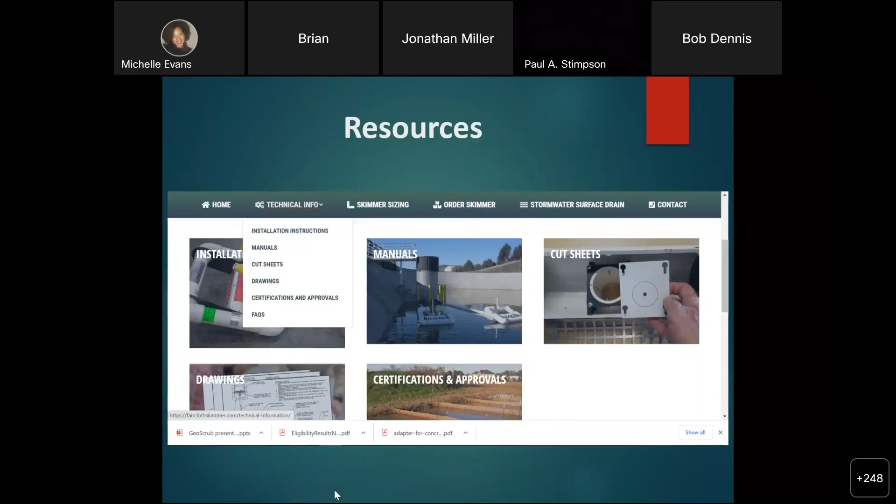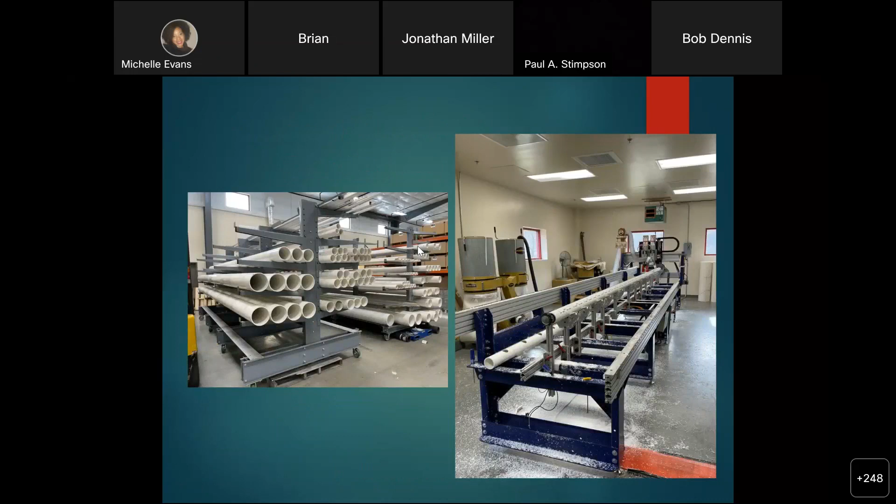So there's lots of resources. I like to point this out on the website. We can see cut sheets, design drawings, sizing, the skimmer sizing calculator right there on the website. We are located right here in Hillsborough, North Carolina. This is our Eno Mountain facility, a modern manufacturing and distribution facility right here in North Carolina, where we manufacture a lot of these pieces. We don't really use any off-the-shelf parts other than the PVC that we start with in building these, using CNC machines to build these pieces and have inventory on hand, typically shipping same day or next day. So don't let contractors tell you that they can't get these, particularly if we're in North Carolina.

Okay, I just saw one question pop up. What is this? I think we're pretty much at the end, but I will. Hey Brian, yes, I have several questions. Do you want me to just start from the beginning? I see those, I just opened up the chat. I saw one pop up just a minute ago. I minimized the WebEx page, so I will go through these. I'm right here at the end, so then I'll... So, sorry, I did not mean to interrupt your presentation. I'm so sorry, I thought you were answering questions. I apologize for that, I saw it pop up. I thought it was at the end.

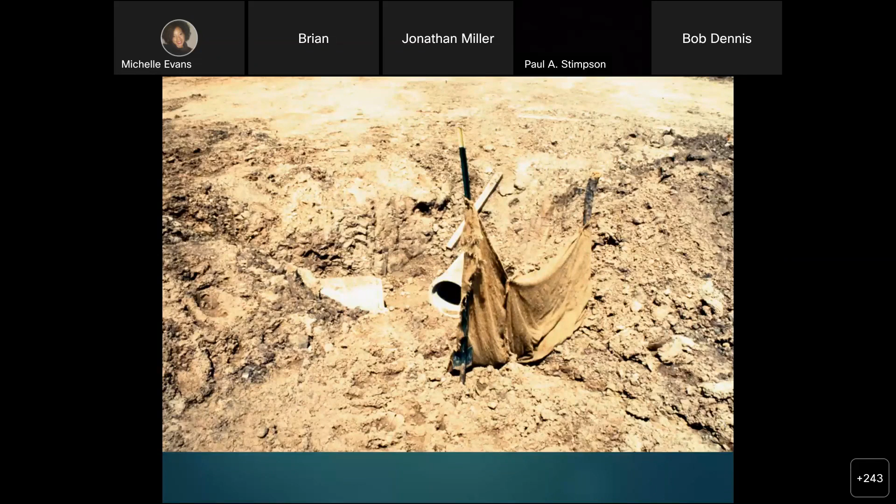So this is just kind of a funny picture that Warren found looking through some of his old slides, and this was inlet protection from the good old days. In the past, sediment control just had to be an effort, not necessarily good or successful, just an effort. And today, with inspections and testing of discharge and public awareness, sediment control has to be successful. So we just like to point out that using a Faircloth skimmer in sediment basins is just one component of achieving that success. And so I am here at the end, and we still have a few minutes here.

Okay, there is a question regarding PAM, and there is maybe someone from the DEQ. I know I've been to it, I can't tell you exactly what page, but there is a list for flocculants, and it might be under flocculants instead of PAM. Rebecca asked the question where the PAM list is on the NCDEQ's DWR website. Or actually, I think she's just posting that for everybody. Yeah, she was just letting everybody know that that's where... Yes, okay, that's great, I just clicked on that.